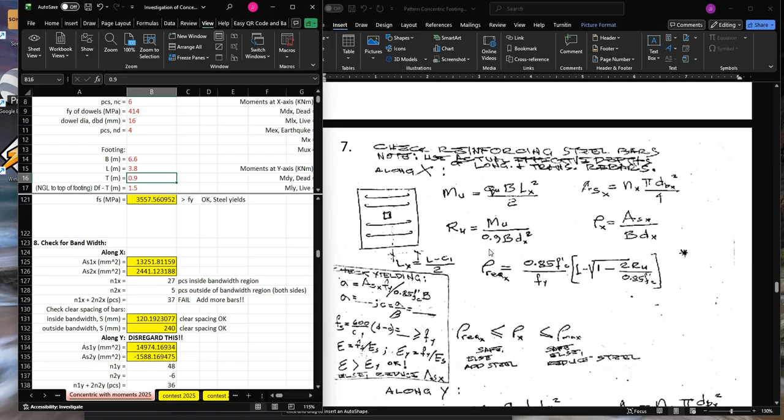dito sa check number 7 along X. Yan yun. Itong dx, this is also taken from check number 7, dito.

Dito tayo ngayon sa AS2X. Ito yung rebars dito sa outer strip. Take note na this is divided by 2 kasi you have two outer strips, dito sa taas saka dun sa baba. This is equal to i-minus mo dito - so rho required X times B dx minus AS1X, divided by 2. Dahil i-distribute natin yan dito sa parehong outer strips.

Next, meron tayo ngayong number of pieces na N1X. Yan yung required number of pieces na kailangan nandito sa loob ng bandwidth. So that is yung area ng bars sa loob divided by the area of 1 bar.

Next is kukunin natin yung required number of pieces dito sa outer strip which is equal to N2X. Take note na naka-round up yan, ano? Hindi pwede ang may decimal place. So kapag ang N1X mo is 5.4 pieces, i-round up mo siya ng 6 pieces. Yung 5.6 magiging 6 pieces din.

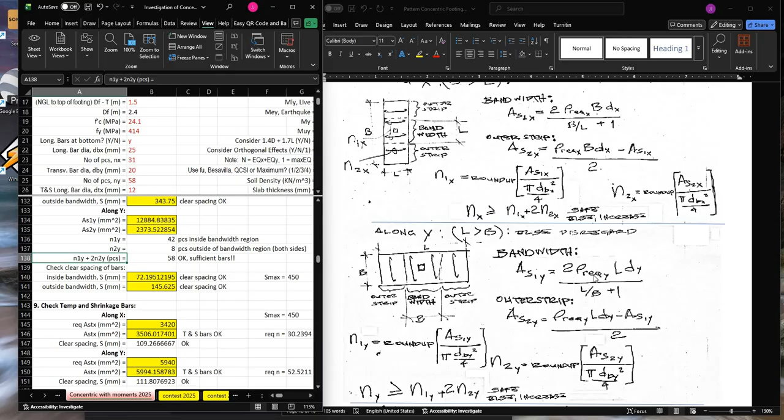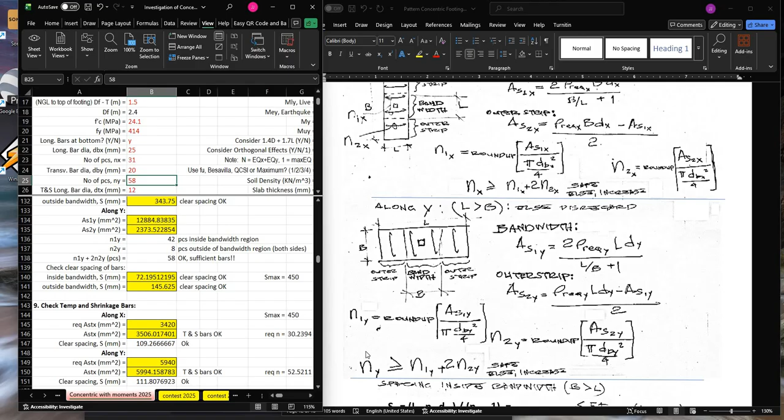Ang una mong kukomputin dito sa along Y, syempre yung AS1Y, then AS2Y. Then you compute the number of pieces dito sa inner strip or bandwidth, N1Y tsaka N2Y. Then you add this up. Dapat yung actual number of pieces mo, NY, should be greater than or equal to your required number of pieces.

Next, we will also check the spacing inside the bandwidth. Again, dalawa ito, for bars along X and bars along Y.

Ngayon kapag ganito yung layout natin, in this case your B is greater than L, i-consider natin yung spacing nitong mga horizontal bars or DBX. So ito ngayon ang mag-govern, DBX. Ngayon ang spacing mo, S1 is equal to the quantity L minus N1X times DBX.

Ngayon bakit ang dimension dito ay L? Hindi B, dahil ang kinocompute natin dito ay S1. Ito yung spacing dito sa loob, so take note na ito ay square. So ang dimension nito ay L din, which is this, kasi square yan. Okay so L minus number of pieces ng mga horizontal bars multiplied by dBx.

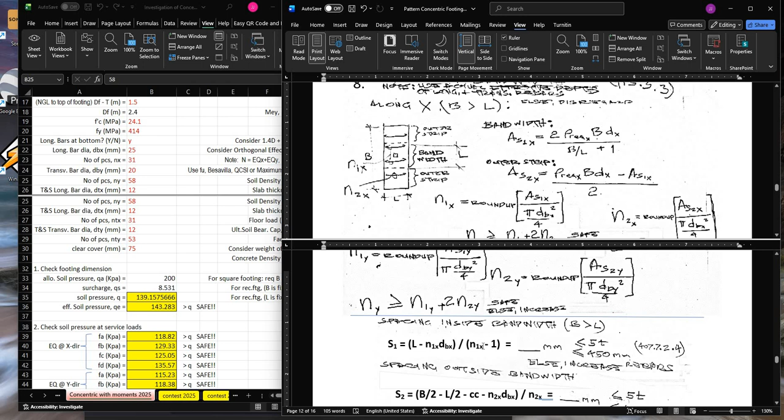And then i-divide natin yan ng N1x minus 1. Remember na yung N1x na yan yung na-compute natin dito. Take note na round up na yan. So ito yun, inside bandwidth S1, ito, which is this.

So if I will show the equation, that is equal to B15 times 1,000. Ngayon yung cell na B15 na yan yung ito, yung L. L times 1,000 para maging millimeter. Minus N1X. Ano ngayon yung N1X na yan?

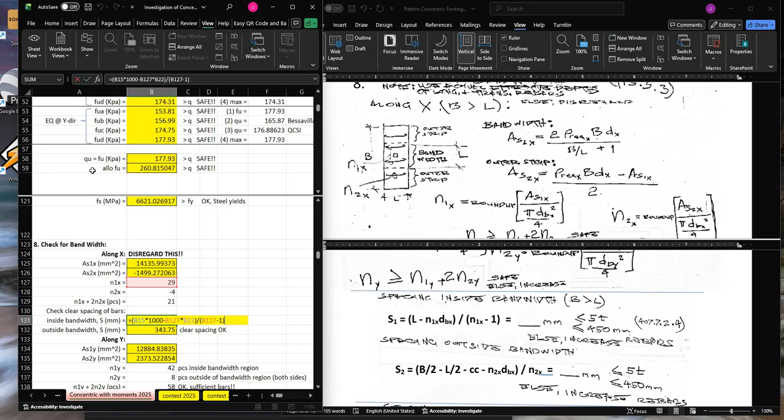Yung B127. Ito yon. Take note that this is already rounded up. Times dBx, ito yon, nandito sa taas. Divided by N1x minus 1, which is ito, minus 1. And that is equal to 209.82 millimeter.

Ngayon i-compare natin yan dito kay 5 times thickness tsaka 450 mm. Dapat masasatisfy yung dalawang equation na yan. Otherwise, kung hindi satisfied ang isa dyan, then mag-fail tayo sa bandwidthing.

Now let's check here, 5 times thickness T, ito. Take note that this is in millimeter. So 4,500. And next is 450 mm. Yung 5T is 4,500 and then 450 mm is greater than this.

Therefore okay. Next, computin din naman natin yung spacing outside the bandwidth, dito yan sa outer strips. Kukunin natin yung spacing, itong mga horizontal bars, let's take this as S2. So that is now B divided by 2 minus L divided by 2 minus clear cover minus N2x dBx divided by N2x, which is this equation.

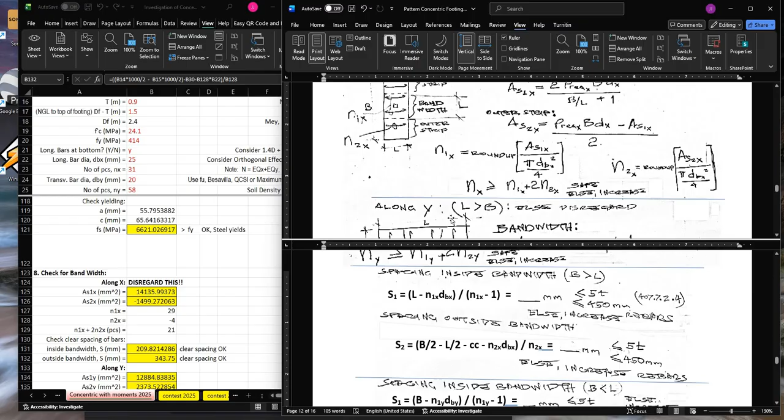And then for along Y, for this layout, ganito naman yung equation ng pag-check ng spacing ng bars. Pinalit-palitan mo lang yung mga dimension, yung mga given data. So for example, ito sa S1, this is L, dito naging B. Yung N1X naging N1Y, yung dBx naging dBy.

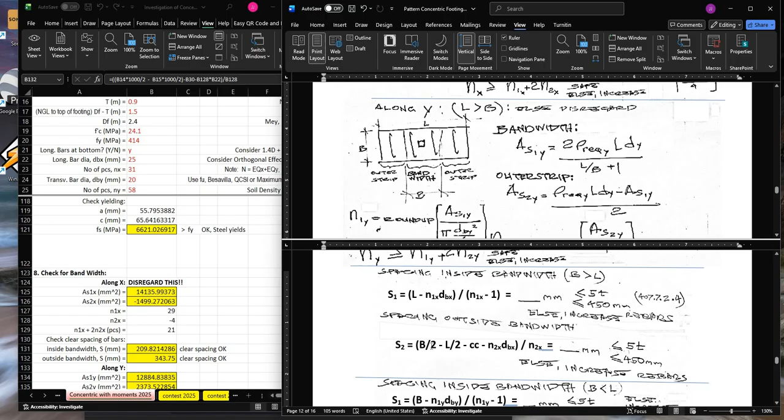Now let's go to check number 9, which is temperature and shrinkage bars. Before going to check number 9, meron ako nakalimutan.

Dito sa check number 8 for bandwidthing, this is taken from the code 413.3.3. Tingnan lang natin yan. Ito siya, two-way isolated footings. 413.3.3 says that the design and detailing of two-way isolated footings shall be in accordance with this section and provisions of section 407 and 408. So etong equation na yan, 2 all over beta plus 1, is actually this equation.

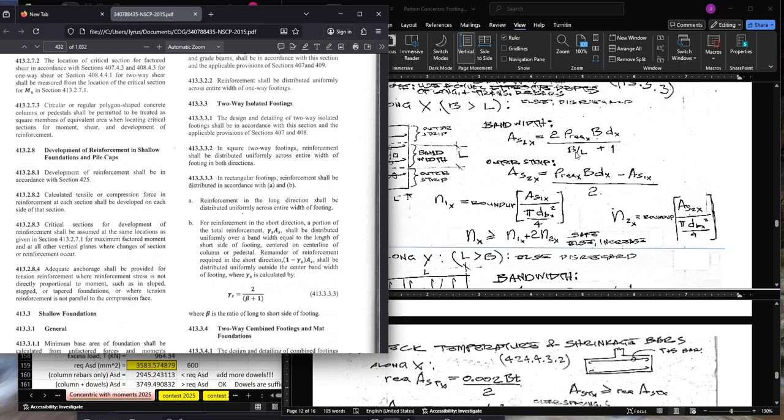2 rho required times L dy divided by LB plus 1. Yang L over B na yan, yan yung beta, where beta is the ratio of long to short side of footing, L all over B. Pag dito sa along X, yan may magiging B all over L.

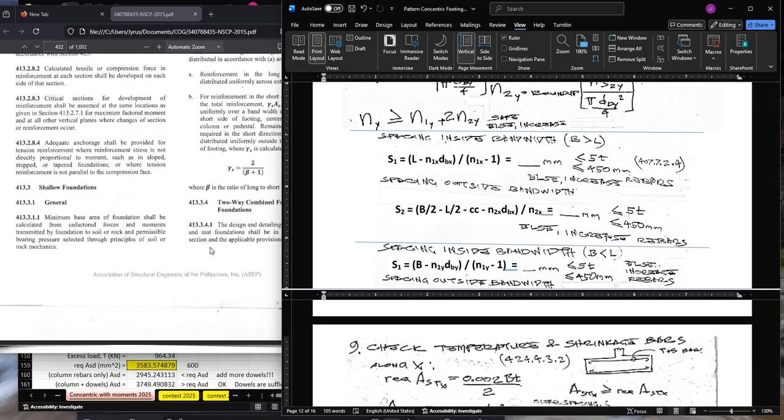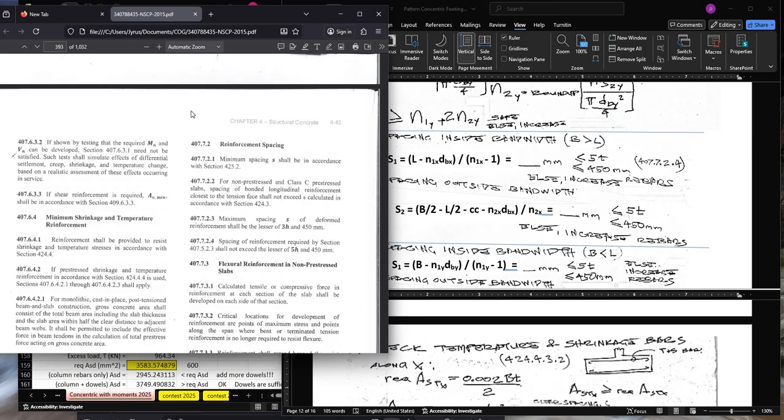Next, dito sa spacing, nasa code yan 407.7.2.4. Hanapin natin. It says that spacing of reinforcement required by section shall not exceed the lesser of 5H and 450 mm, wherein H is the thickness of your concrete or T for our footing. Okay, so nakalusot tayo dyan, meron tayong code.

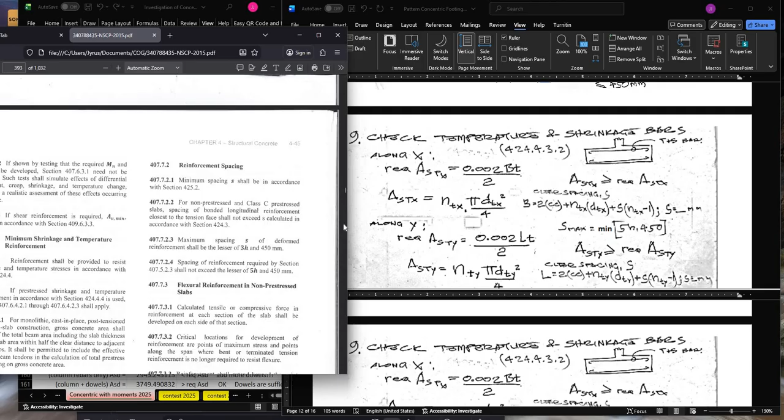So balik na tayo ngayon kay temperature and shrinkage bars. So let's look at 424.4.3.2. Ito yun, napit lang natin, 424.4.3.2.

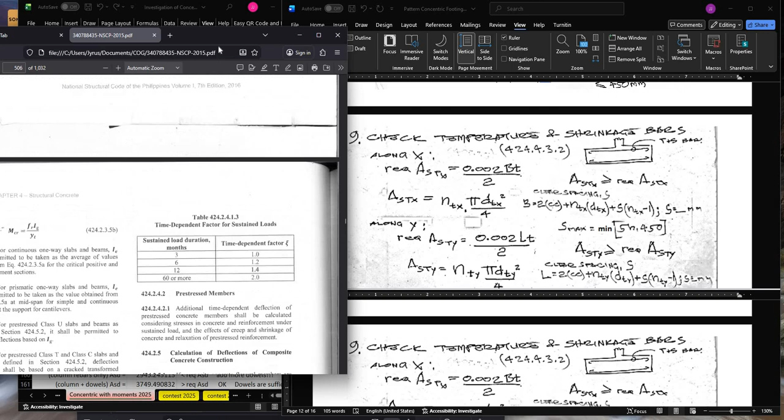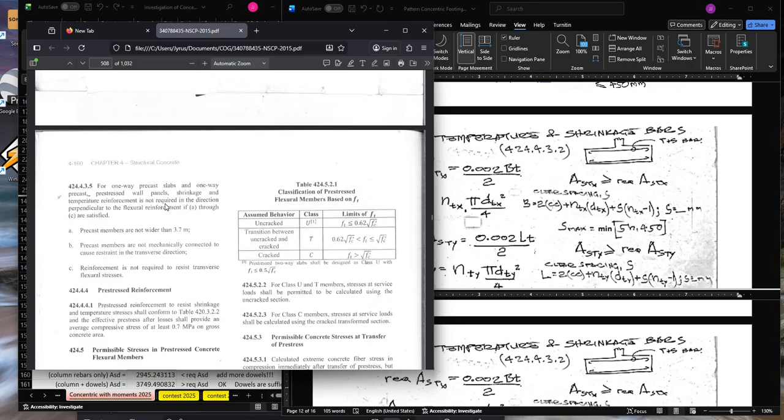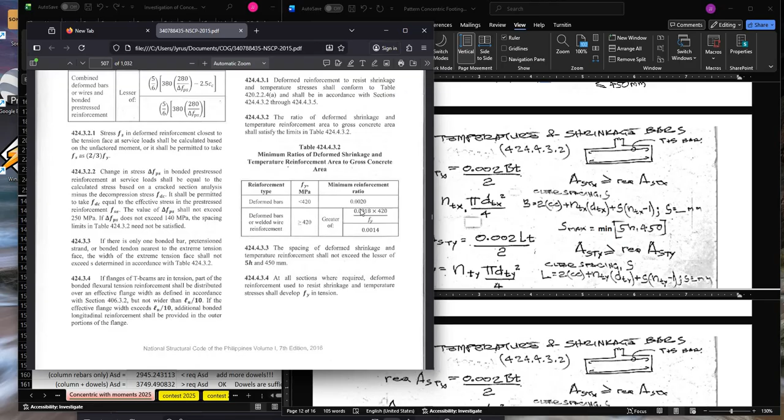424.4.3.2. The ratio of deformed shrinkage and temperature reinforcement area to gross concrete area shall satisfy the limits: 0.002 for deformed bars less than 420 megapascal. If greater than 420, we use 0.0018. Okay, so that's how it is.

Why did I divide it by 2? Because let's say this is our section, this is our footing. We have reinforcing steel bars at the bottom. So half of the footing, the temperature shrinkage will be carried by the bottom bars. So what we'll compute now is the temperature bars at the top. So that's the purpose of dividing by 2.

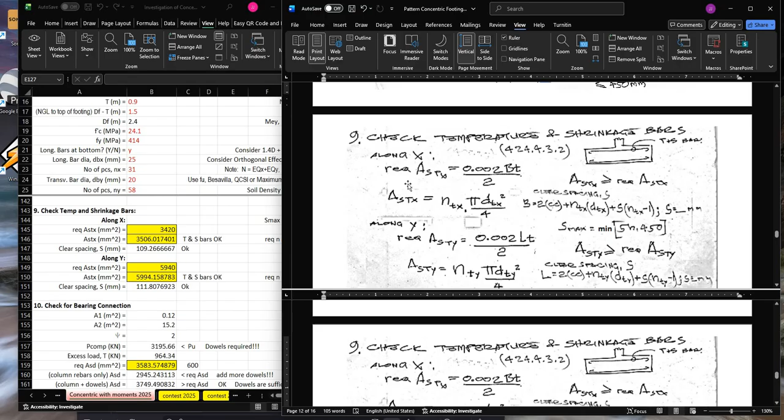Okay, so for bars along X, aside from main bars, we also have temperature and shrinkage bars along X, defined by DTX, and NTX or number of pieces. So your required reinforced temperature and shrinkage bars is 0.002 times B times T divided by 2.

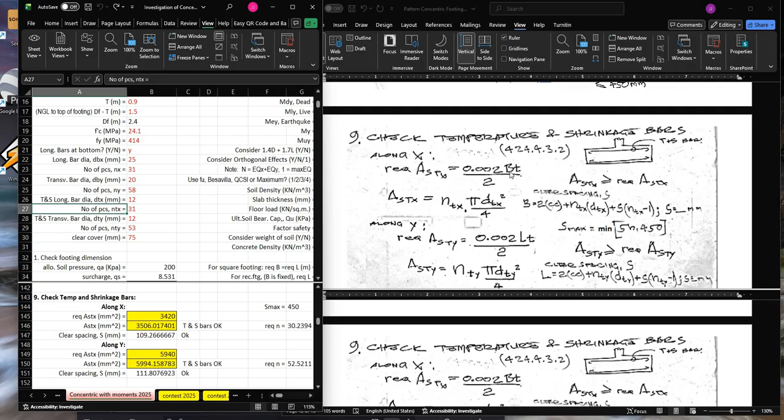Now why is B our multiplier there? Because our NTX has this direction, so you consider the dimension B. Now when we check the bars along Y, our section would be your L. So for along Y, L is what we compute there, times thickness T. Now let's go back.

So this is the required ASTX. Now the actual ASTX should be greater than your required.

Now how do we compute the actual ASTX? Multiply the area of temperature bars with the number of pieces, NTX. And then you compare it with your requirement. Okay, so if this is satisfied, then okay. Otherwise, add more number of pieces of temperature bars.

And then we compute the clear spacing. You always check your clear spacing. It should satisfy the limits of 5H and 450. Which rarely fails, by the way. Usually it passes. So let's look at this equation.

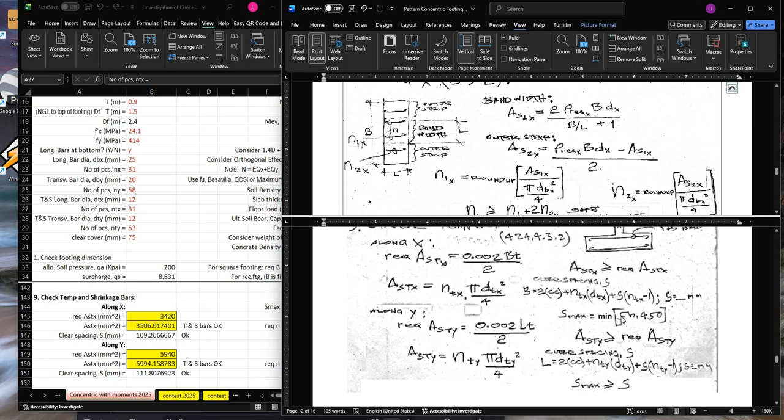Okay, so let's follow this sample now. So first, we compute the required ASTX, which is this. 3420. So let me compute.

0.002 times B. Now our B is 3.8. Multiply by 1,000 since it's in meters, multiplied by thickness, another 1,000, divided by 2. And that's how you got 3420.

And then the ASTX is equal to this. So there it is. Next.

Let's compare the two. So your ASTX is greater than the required ASTX. Therefore your temperature and shrinkage bars is okay. That's how it is. If ASTX is greater than or equal to the required value, then your TNS bars are okay. Otherwise you have to add more.

Now let's check the clear spacing S. The equation for clear spacing S is simply this. That's how it is. So this B, we just isolated this S from this equation. Then we compare it to your S max.

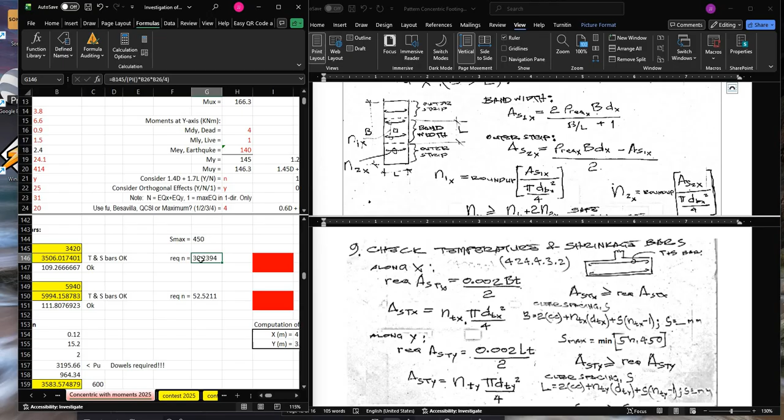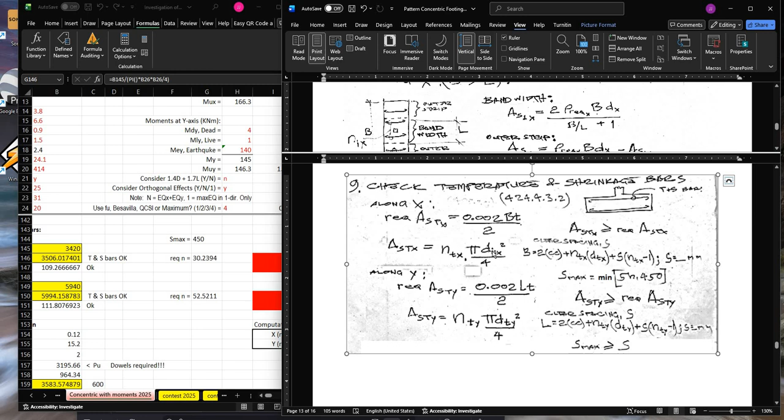Next, let's go to along Y. The procedure here, I mean the principle along Y, is the same as along X. But what I'll replace is instead of B, we use L. Instead of DTX, you use DTY. Instead of B, make it L. So forth and so on.

And then let's go to check number 10. This is for bearing connection. So what we consider here now is the connection of the column to the footing. So of course, our column, the column reinforcement, is embedded in the footing.

Let's check if that's sufficient. Otherwise, if it's not sufficient, we'll add extra bars, also known as dowel bars, which usually aren't needed. Okay? But let's check it anyway.

This is taken from the code, section 422.8.3.2. Nominal bearing strength Bn shall be calculated in accordance with table 422.8.3.2, where area 1 is the loaded area, and area 2 is the area of the lower base of the largest frustum of a pyramid, cone, or tapered wedge.

Okay, so let's go to area 1. Siyempre, that is the loaded area. That is defined by the cross-sectional area of your column.

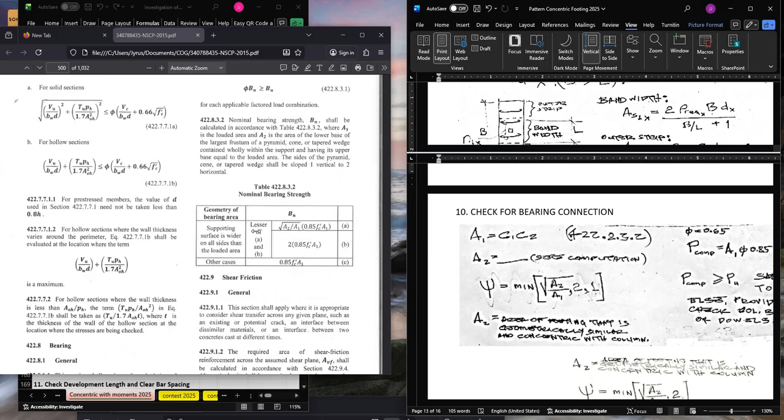Konti lang naman. Now, before going there, let's go to the sample. So we have area 1, 0.12, and then you compute area 2, which is, by the way, this.

Okay, so area 2 is the area of footing that is geometrically similar and concentric with the column. The code's explanation says area 2 is the area of the lower base, contained wholly within the support and having its upper base equal to the loaded area.

I simplified the explanation for that. Ibig sabihin, it should be geometrically similar and concentric with the column. Parang in-scale mo lang yung C1, C2 — proportional dapat yung X at Y dito sa C1 at C2.

Okay. Now, your psi, or this factor, is the minimum of square root of A2 over A1, or 2. Okay, next, let's get the dimensions of area 2, defined by X and Y.

Now, this figure is applicable for concentric footing. So your X is the minimum of C1 plus 2A, or your L. And then Y is the minimum of C2 plus 2A, or B. Now, what is A? It is equal to twice your thickness T. Okay, so from here, your area 2 is X times Y.

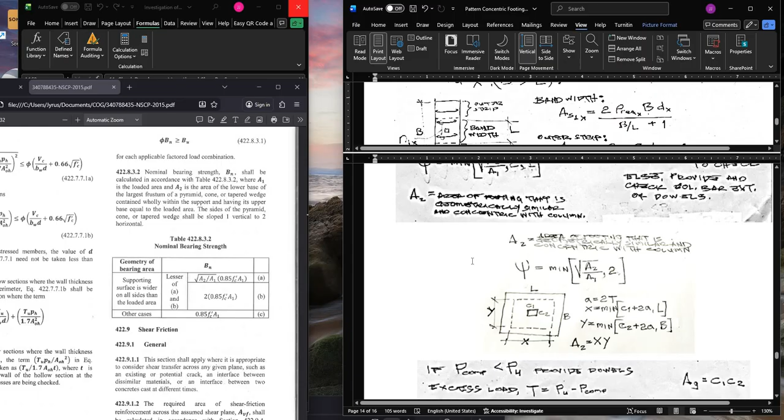Okay, so now we have A2. Next, we compute your psi, which is the minimum of this. So let's compute A1 and A2, then we can compute psi.

So let's compute: square root of the quantity A2 divided by A1, close. It is 11.25. Ang minimum dyan ay syempre itong 2.

Okay, next, we will now compute your P compression, or the actual compression capacity provided by the existing dowels or your column. Your P compression is equal to area 1 times phi times 0.85 times F prime C times psi. Okay, this is the axial force contributed by the concrete section. Now, your phi is 0.65 — this is the capacity reduction factor for compression or bearing. So now we have P compression.

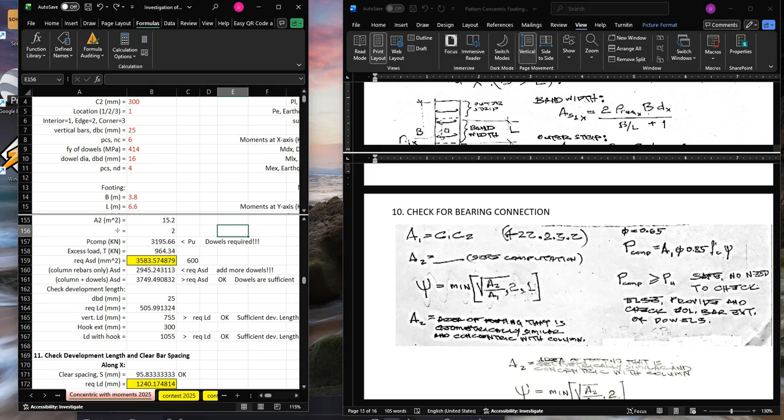And then your PU, that's taken from up here — 4160. Now, let's compute your P compression. So that is equal to area 1, which is this. Take note that's in meter square, so we multiply that by 1,000 times 1,000.

Multiplied by 0.65, multiplied by 0.85 times F prime C. Where is F prime C? Here. Then times your psi — click link mo dyan, so that's how I got it. And then you divide this — take note that what we computed is in newtons — so we divide by 1,000 to convert to kilonewtons.

So that's it, and then compare that with PU, which is 4160. Okay, so your P compression is less than your PU. Ibig sabihin, hindi kaya ng section yung PU, so we need dowels.

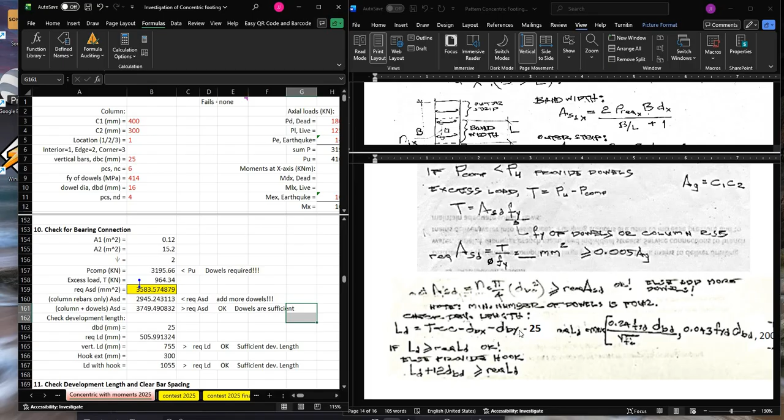Next, we will now check your development length. So ang development length, yan yung length ng reinforcing steel bars na nakabaon sa concrete. And that is equal to: LD is equal to actual development length is equal to thickness of footing minus clear cover minus dbx minus dby minus 25.

Initially, ang chine-check natin na development length, yung ito lang, yung part ng column rebars na nakapatong dito sa footing rebars. Okay? So ang distance na kino-consider natin ay ito lang, yung part na yan. Which is equal to, let's say, thickness T, minus clear cover, yung nasa ilalim, minus diameter of bar X, minus diameter of bar Y, and mag-minus ka ng 25 mm. Siguro yung 25 mm, parang kino-consider mo yung bend. Okay? Minus 25 mm.

Next, if hindi to masatisfy, then that's the time na mag-provide ka ng hook. Ano ngayon yung hook na yan? Yan na. So in reality, etong column rebars mo, hindi lang siya diretso. Meron pa siyang binebend sa baba. So yan yung kanyang hook.

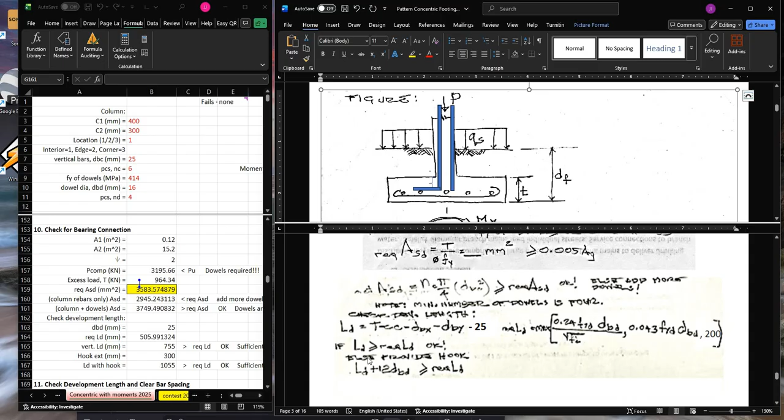Actually, dadagdag natin yan. So LD plus 12 diameter of bar of dowel. Actually, ang kinoconsider lang natin diyan ay 12. Pero in reality, ang minimum dito ay 1 foot or 300 mm. And what is 300 mm? That is 12 times, let's say, 25 yung rebar mo. 300 mm na yun.

Okay? So let's check again. So from here, ito yung required LD. The required LD is the maximum of these three conditions: 0.24 times Fy of dowel times diameter of dowel bar divided by F prime C, square root of F prime C, or this equation, no?

And saklaw diyan yung 200 mm. So kukunin mo ngayon yung maximum diyan. Then you compare it with your LD na vertical lang. Yan, ito lang, yan lang.

Ngayon, kapag nag-fail, then that's the time na i-consider mo siya diyan. Okay? So ito yung initial LD na walang hook. Ngayon, ito yung 755 pala, no? So 755 is greater than yung required LD natin. Kaya okay na. Ngayon, yung hook extension natin ay 300 mm.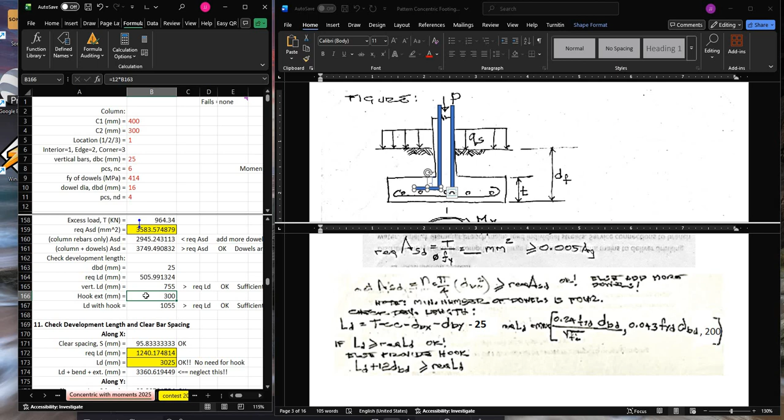So if you will check, LD with hook is 1055. And this is greater than your required LD. So it is sufficient development length. Then let's go to check number 11.

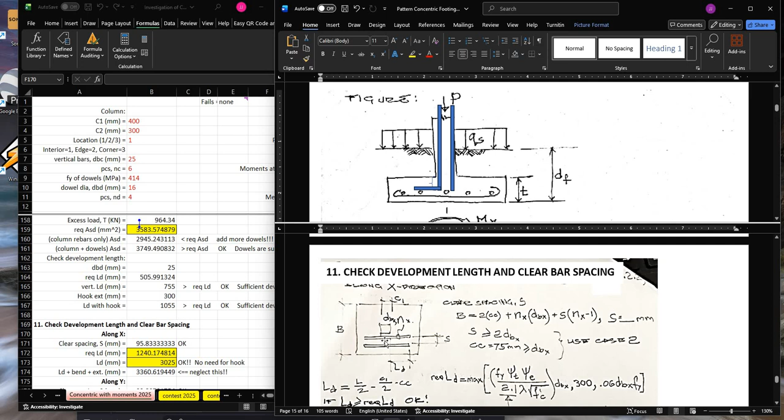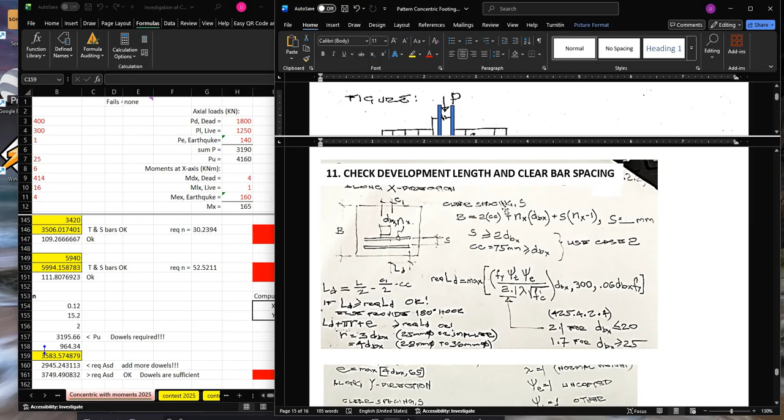Check development length and clear bar spacing. Ngayon, ang i-consider natin dito yung reinforcing steel bars na DBX tsaka yung DBY. For number 11, this is check development length and clear bar spacing. Consider na dito tayo ngayon along X direction. Okay? So this is about DBX and NX. And this is clear bar spacing. So let's take that as S.

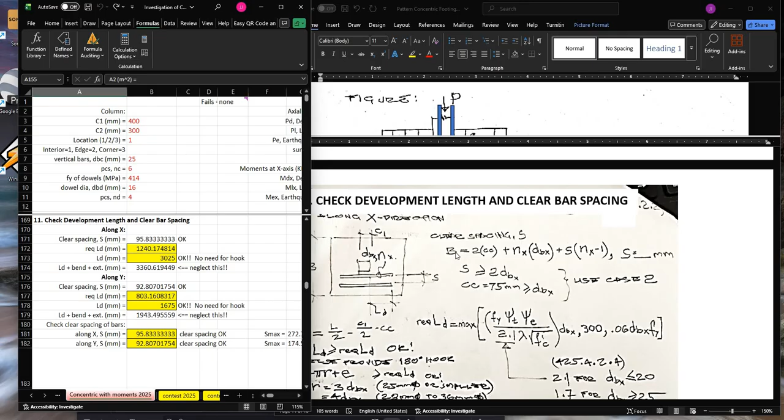Ayan, S, ano? And what is S equal to? By simple geometry, no? I-plot niyo yan sa AutoCAD. Ganito rin yung lalabas na equation, no? Your B dimension is equal to twice of clear cover dito sa gilid-gilid, plus number of pieces NX, times multiplied by bar diameter, plus yung clear spacing multiplied by NX minus 1. That is equal to your B. And ngayon, i-isolate mo yung S, ilabas mo yan. Lalabas yung number of pieces. Ayan, so nag-open ako ng AutoCAD.

So nag-offset ako dito ng 75 mm. And then, ang dimension na yan yung 6.6 meters, ano? And then, itong dimension na yan, that is 3.8 meters. So, actually, ganito yan.

Gumawa ako ng rectangle measuring 6,600 by 3,800 in terms of millimeter. Tapos, in-offset ko ito ng 75 mm. Yan yun. Tapos, in-explode ko lang yan. Tapos, let's say, kukulayan ko ito ng green.

Okay? Let's say, yan yung ating bakal. Ngayon, yung bakal natin, dbx is 25 mm. Okay, so copy ko yan na 25 mm. Ay, sorry. Hindi pala ako naka-auto.

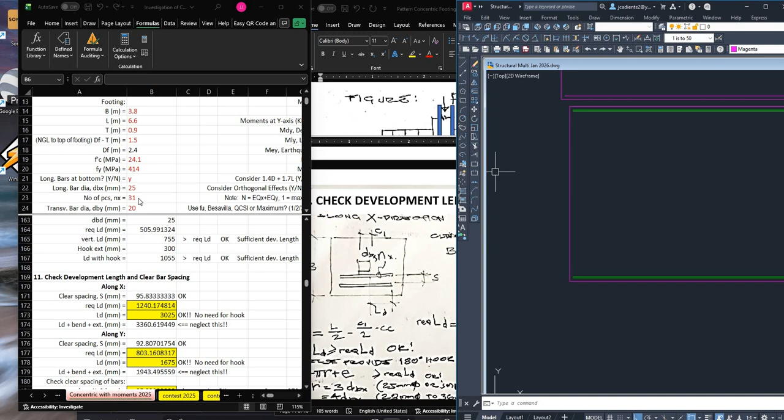So I will copy this, 25. Then, copy ko rin ito pababa na 25 mm. Yan yung bar diameter. Tapos, ilang piraso yan? That is 31 pieces.

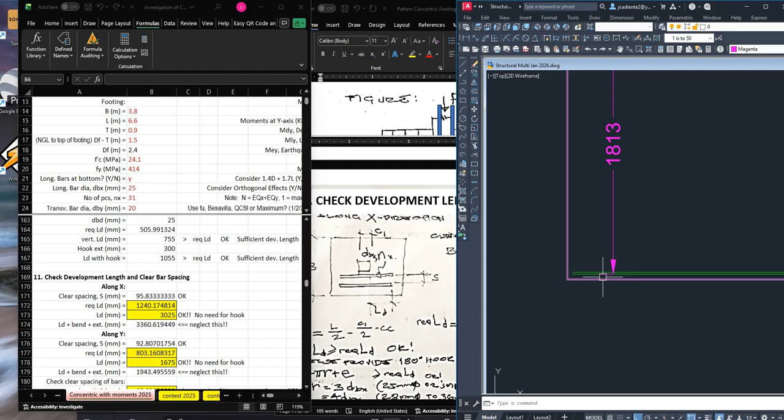Okay, so let's measure this from, let's say, yan hanggang dito. So that is 1813. Ngayon, let us divide 1813 divided by 30. Ayan. So 60.43 mm. Try natin, ano?

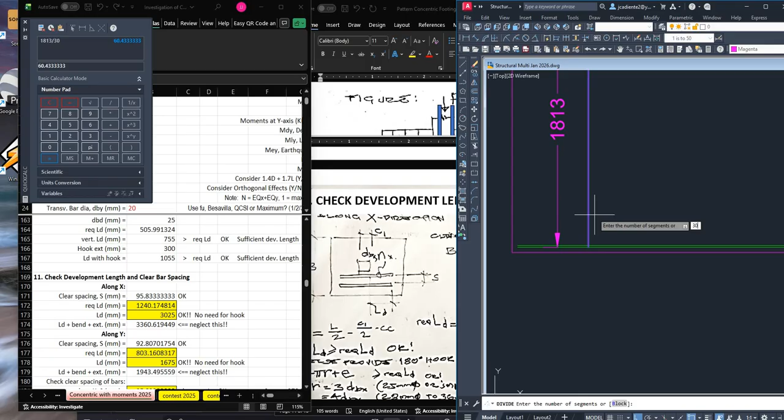Huwag na natin i-divide. Gawa na lang tayo ng line. Yan. Yung sa baba. Tapos, divide natin yan by 30. Ngayon, saan ko kinuha yung 30? That is equal to nx minus 1. Yung ating nx is 31. So, 31 minus 1 will give you 30.

Let's check kung tama yung sinasabi ko. Ano? And then, we will copy that. Dyan, paste natin. Yan. 1, 2, 3, 4. So, things like those. Then, copy natin yan.

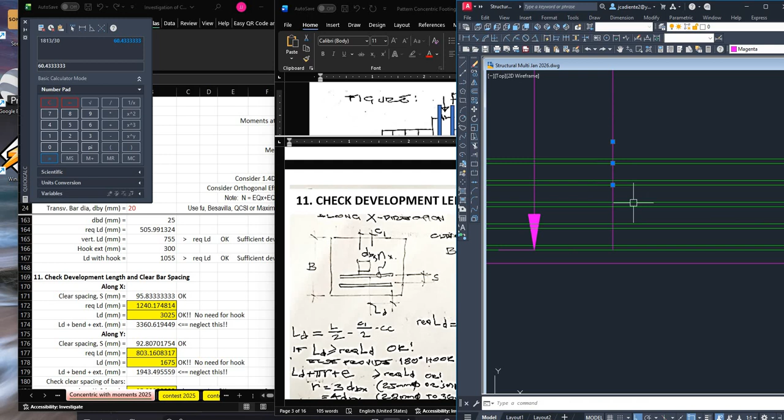Wait lang. Okay. So, copy. Doon sa may nodes. Ayan. Copy natin doon. Saka, eto. Copy rin natin dyan.

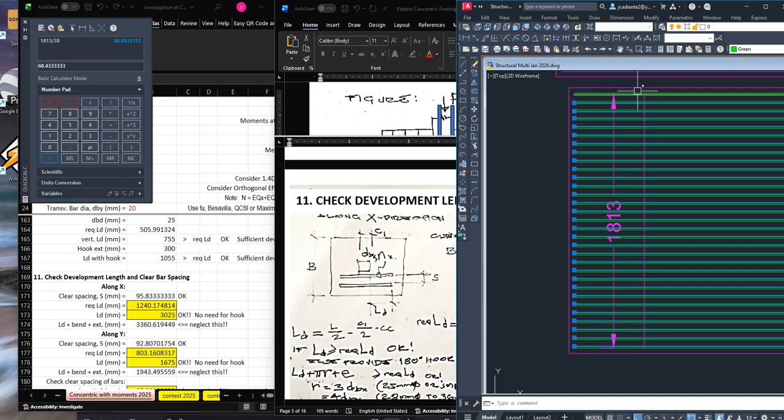So, bilangin na natin yan ngayon. Dapat 31 pieces to, no? 1, 2, 3, 4, 5, 6, 7, 8, 9, 10, 11, 12, 13, 14, 15, 16, 17, 18, 19, 20, 21, 22, 23, 24, 25, 26, 27, 29, 30, 31 pieces. So yan, 31 pieces.

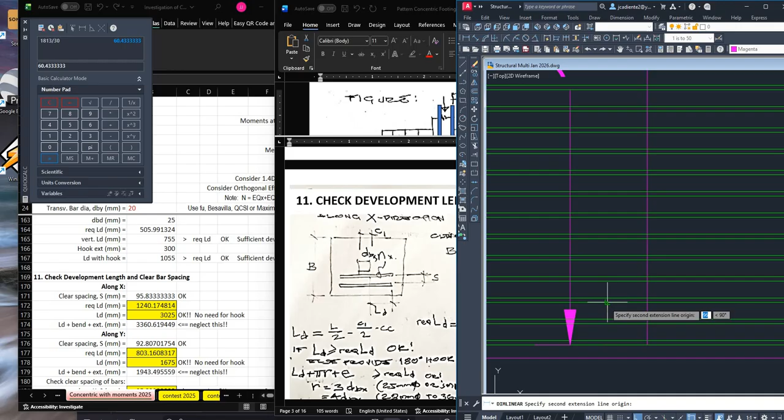Ngayon, bilangin natin or sukatin natin yung clear spacing between bar. Ayan, so 48 mm. Lahat yan, 48 mm ang spacing yan, ano? O, see? Ngayon, paano natin kukumputin yung 48 mm? So, ito yon. Oops.

So, that is equal to this equation. Now, let's check. Hala, sorry. Ang 1:50, palitan ko to ng 1:100. Mali. Yan. So, ulitin ko, 1:100.

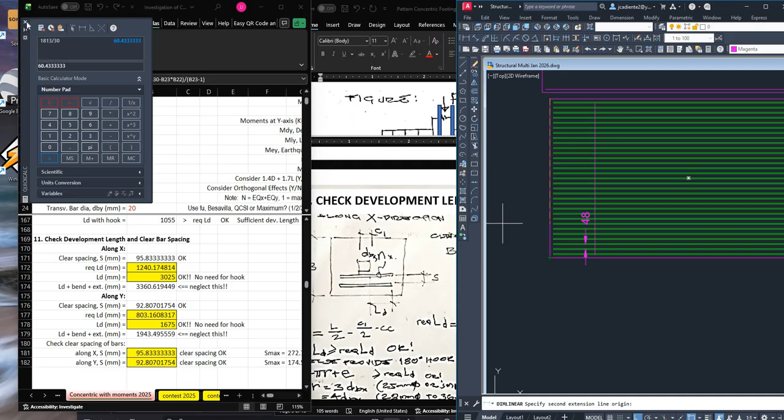This should be 3.8 meters, or 3,800. Yan, okay na. And then, ngayon, yung clear spacing dyan, yung S, it should be 95.8. Okay? So, ayun o, yun, 95.83.

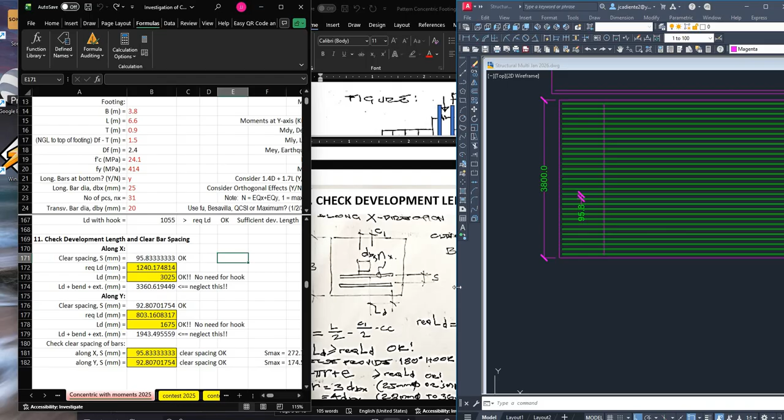Gets nyo na ha? Ngayon, check natin. So, wag na natin i-check kasi na-check mo na. So, ito yun. Okay? So, if i-plot mo siya, 95.8, ganyan. Ngayon, mathematically, yan yung equation niya.

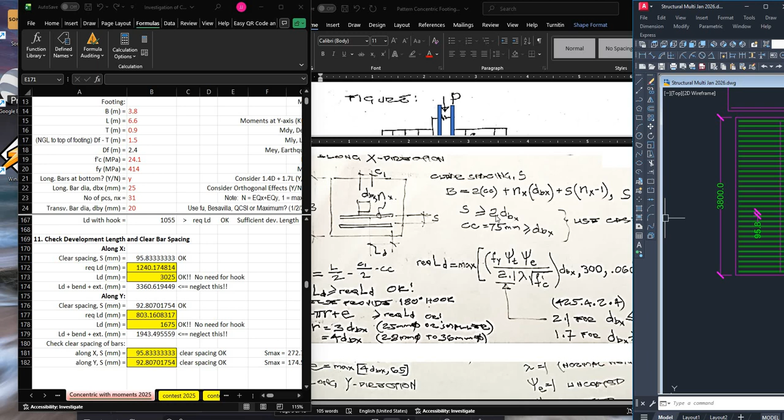So, i-compare natin siya kay twice of dbx. Dapat, yung clear spacing mo should be greater than twice of dbx. Tapos, yung clear cover mo na 75 mm, it should also be greater than dbx. So, if these two conditions are satisfied, then we are going to use case 2.

Ano naman ngayon yung case 2 na yan? Anyway, yung case 1 kasi is less than. Kapag hindi na-satisfy yung dalawang conditions na yan, use case 1. But kadalasan, nasa-satisfy itong dalawang condition na yan. Kaya case 2.

Anyway, what is case 2? Ang ibig sabihin niyang use case 2 means okay. Hindi ko na na-edit ito. Ito yun, no? If and twice of blah, blah, blah, then, ito yan. Okay. Use case 2.

Otherwise, fail, use case 1. Ganyan sana. Pero actually, instead na use case 2, ginawa ko na lang na okay. Yan yun. Pangpagulo lang yan.

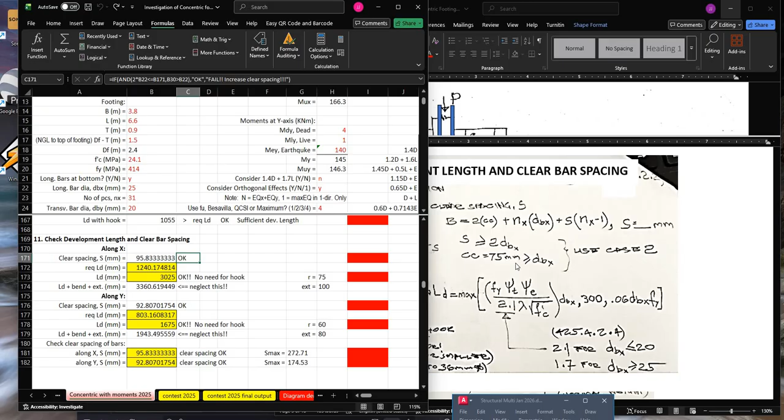Okay. Which leads us now to computing your required development length. Ngayon, ang development length mo dyan starts from the face of column towards the end of the reinforcing steel bars. Yan yung actual development length mo.

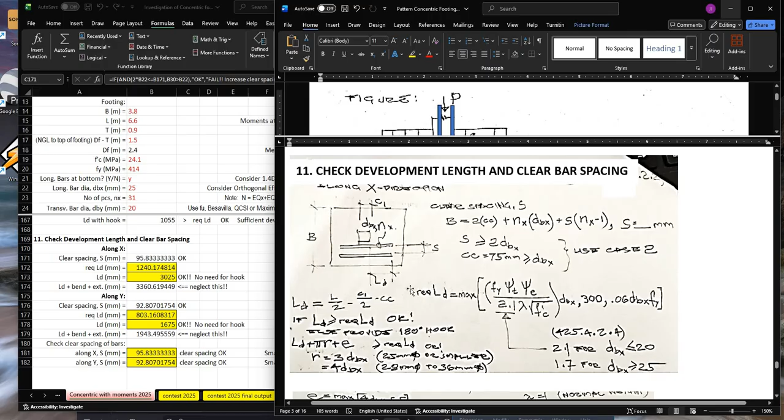Ngayon, bihirang nagfe-fail yan kapag concentric footing. Pero pag yung footing mo, edge or corner footing, there is a possibility na magfe-fail yung development length ng short dimension, which we will be covering this on later topics.

So let's compute first the actual development length LD. So actual LD is equal to L all over 2 minus column dimension divided by 2 minus itong clear cover. Okay? And then yung required LD natin, okay, meron tayong maximum among 3 equations. Ito ngayon, yung first equation mo, Fy times psi t times psi e divided by 2.1 times lambda times square root of f prime c times dbx, then another 300, and then last 0.06 dbx times fy.

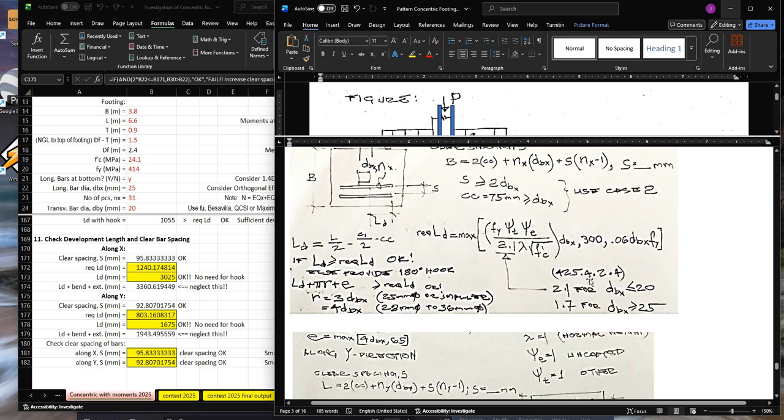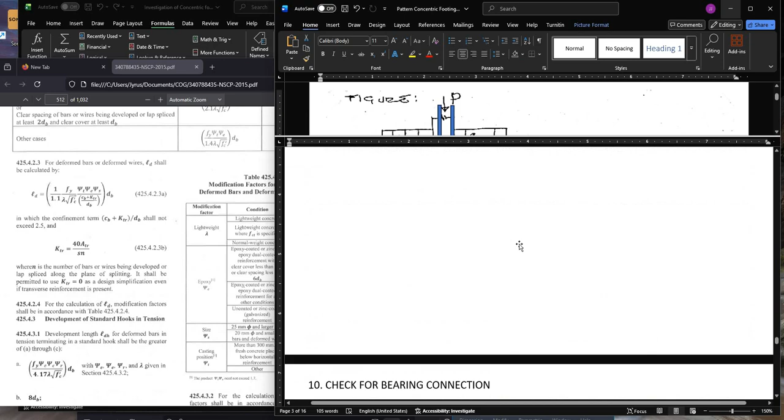Now, that is taken from 425.4.2.4, which is ito, 425.4.2.4. Ito. For the calculation of development length, modification factor shall be in accordance with table 425.4.2.4, which is ito. Ito pala yung equation ng lambda kanina. Yan, lightweight. So, balik tayo sa equation, ay sa check number 11.

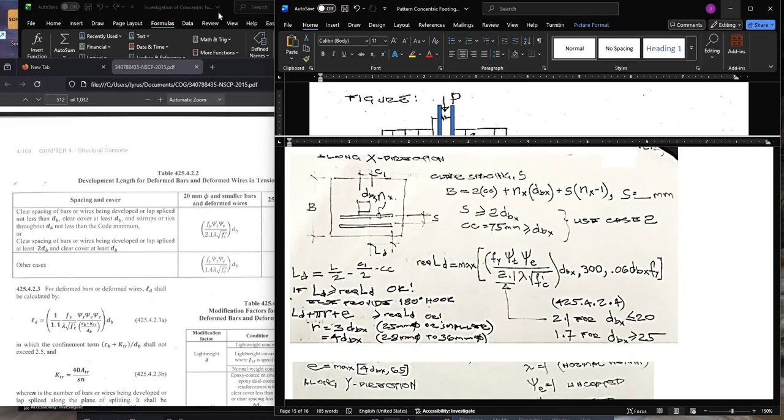Next, we now compare your actual LD to your required LD. Required LD and actual LD. Now, if your actual LD is greater than your required LD, then no need for hook.

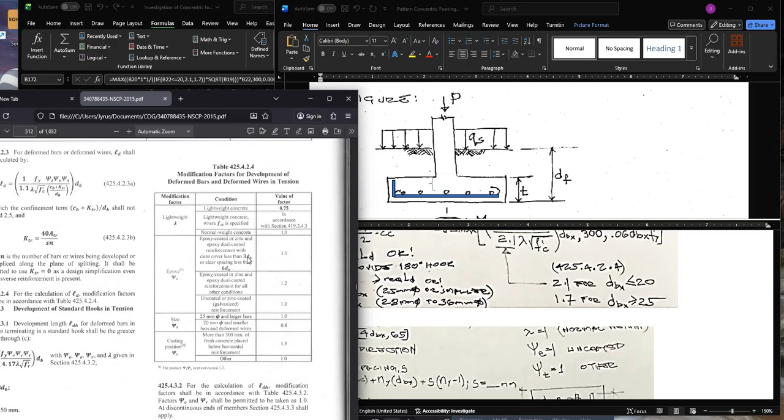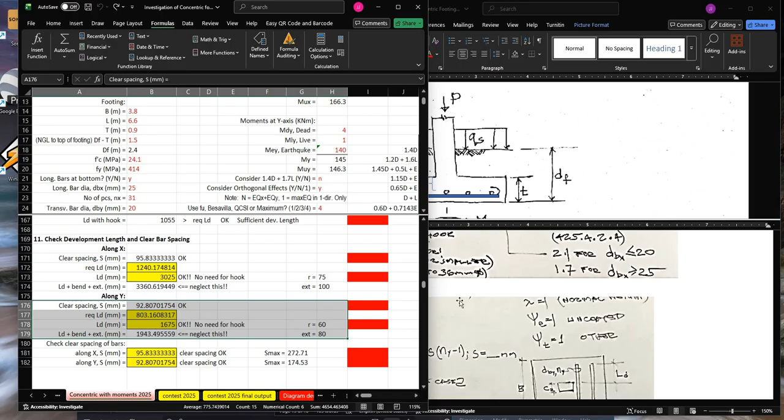So, we've finished along the X direction. You apply the same principle along the Y direction. And then we check the clear spacing of bars.

So for the clear spacing of bars, this is it. L is equal to twice the clear cover plus NY, and then we get the clear spacing S.

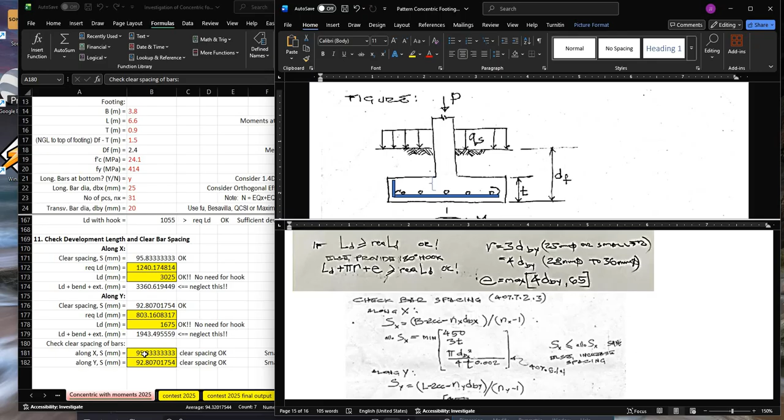This S along X is linked to this one, which is the same as this. And then this one along Y, S, this is the same as this. Then we compute this S, maximum S.

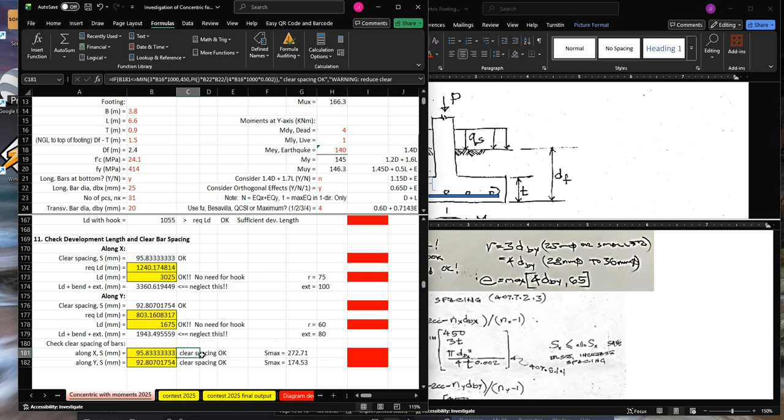Before computing maximum S, let's first check the clear spacing here in the three conditions. So we have the allowable clear spacing along X: minimum of 450, 3 times thickness, and this equation. Where is that? This one.

When I open this, here it is: minimum of 3 times thickness, then 450, then this pi dB squared divided by 4t times 0.002. So you get the minimum of those three. I'll just copy this, then paste it here.

So, the minimum of these three equations is 272 mm. This is greater than your actual clear spacing, so it's okay.

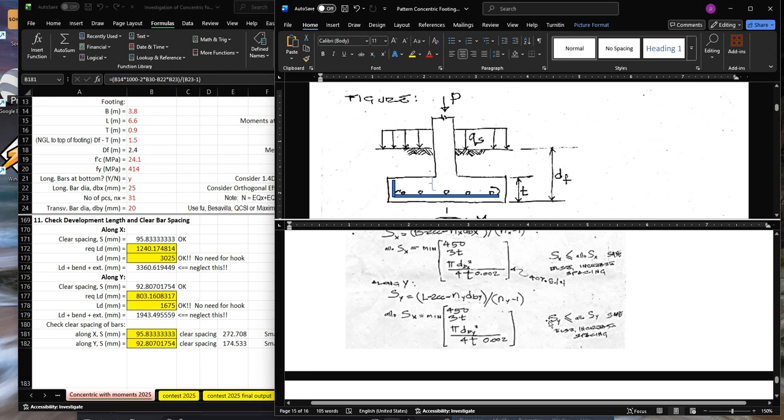Same thing here for SY. Your allowable SY, or your maximum SY, should be greater than your actual SY. Then it is safe, okay?

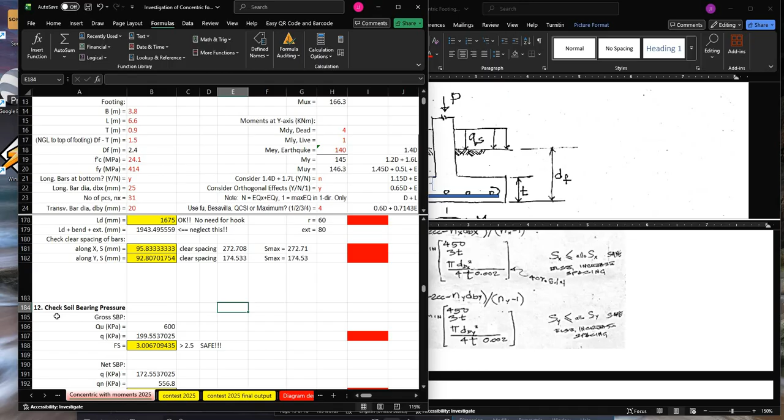And then finally, for check number 12, the last one - check soil bearing pressure. There are three: we'll compute against gross, against net, and effective soil bearing pressure.

So let's go to gross first, which is this. So what we'll compute there is Q. Our actual Q is equal to loads plus weight of footing plus weight of soil plus surcharge,

divided by BL. And if you have moments, add those. So our loads, summation P - these are the service loads you add. Then weight of footing: BL times thickness times unit weight of concrete. And weight of soil - the weight of soil above the footing, multiply by volume. Plus the surcharge, BL times QS.

Divide that by the area of footing, and you get Q. This is your actual soil pressure. Then add the moments if there are any. And then you compare that with your factor of safety.

Now, our factor of safety is capital Q sub U. That capital Q sub U is the ultimate, which is the soil bearing pressure multiplied by the factor of safety. Now, it happens that in our sample, the given is Q sub U, the ultimate soil bearing pressure.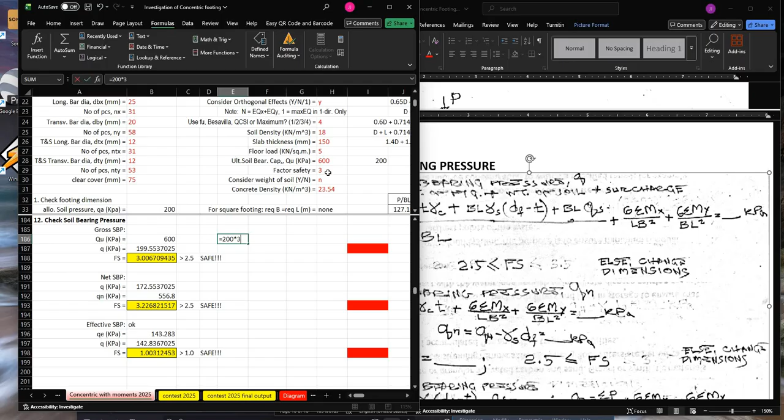So that is 600. Now, in actual practice, they don't give Q sub U. Instead, what they give is the soil bearing capacity, which is 200. So that's 200 if you multiply it by 3 - normally, the factor of safety is always 3.

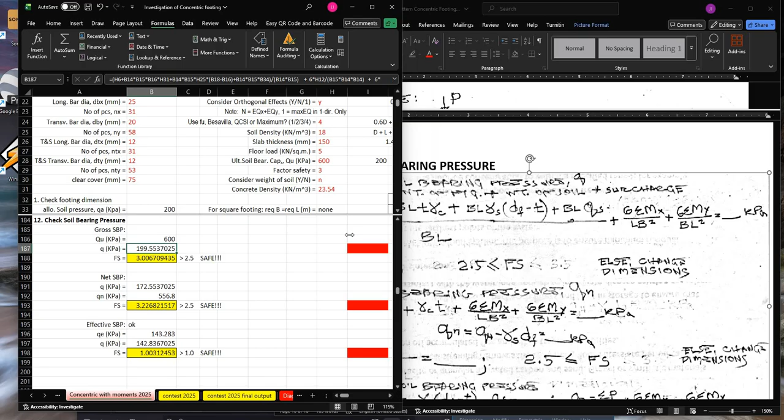So that's how you get your Q sub U. And then here's Q. So you just get your actual factor of safety - that is Q sub U divided by Q. So that is equal to 600 divided by 199, we get 3. Now, this should be greater than 2.5.

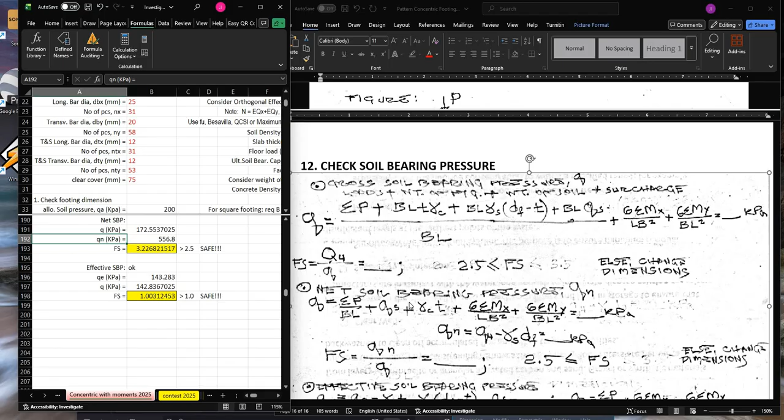For net, what we need is summation P, and then Q sub S, and then subtract the thickness, subtract the concrete. What is this Q sub S? That comes from here, from above - this, the surcharge. That comes from the surcharge. So let's compute.

So that is equal to Q. Let's compute this: equal to summation P over BL - let me just show this. Summation P over BL plus Q sub S. What's this B34? There, that's the surcharge. Plus H31 times B6 - that's the unit weight of concrete times thickness, plus this 6 summation Mx.

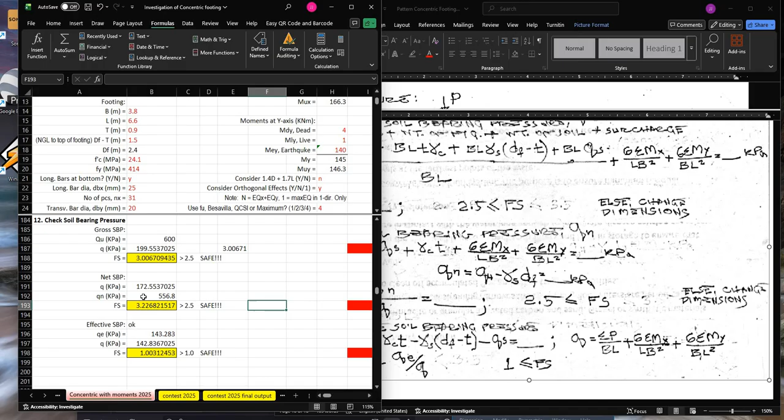Next, we now compute your factor of safety. So factor of safety is Qn divided by Q. Okay, so this is Qn divided by Q. What's our Q now? 172. So that's how I got 3.22.

Again, your factor of safety should be greater than 2.5 to be safe. And finally, the effective soil bearing pressure - Q effective is equal to QA minus unit weight concrete times T, and so forth, minus QS. And our Q is summation P over BL. Your factor of safety should be greater than 1.